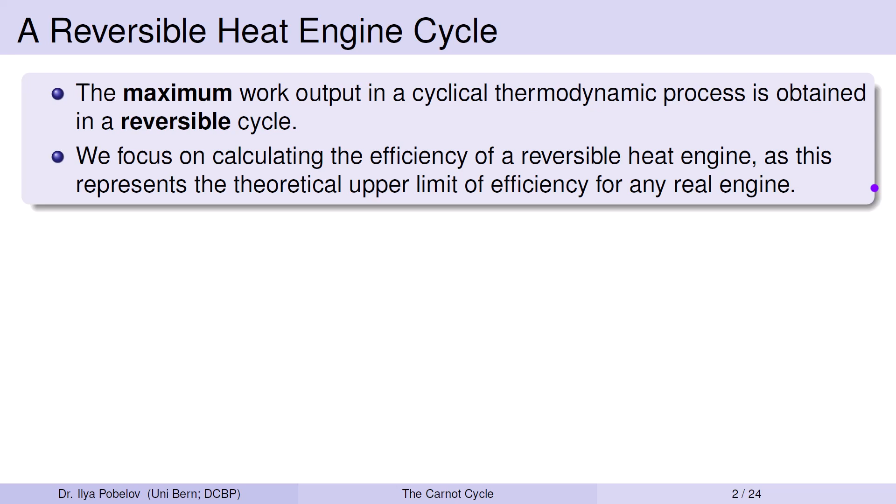As we have discussed previously, the maximum work output in a cyclical thermodynamic process, such as one taking place in heat engines, is obtained in a reversible cycle. Therefore, we focus on calculating the efficiency of a reversible heat engine, as this represents the theoretical upper limit of efficiency for any real engine.

A reversible heat engine converts heat into work by utilizing the natural tendency of heat to flow from a hot reservoir to a cold reservoir. The reversible process in such a reversible heat engine is known as the Carnot cycle, named after the French engineer Sadi Carnot, who was the first to study such cycles in the early 19th century.

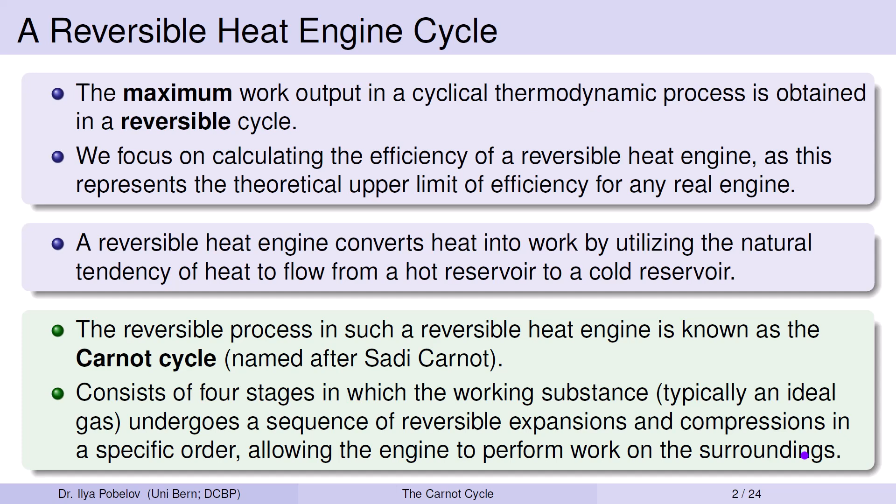The Carnot cycle consists of 4 stages in which the working substance, typically an ideal gas, undergoes a sequence of reversible expansions and compressions in a specific order, allowing the engine to perform work on the surroundings.

The Carnot cycle, also known as the Carnot process, was not described in detail by Sadi Carnot himself. While Carnot introduced the concept of a reversible heat engine in his 1824 work Réflexions sur la puissance motrice du feu, he did not provide a complete thermodynamic description of the cycle.

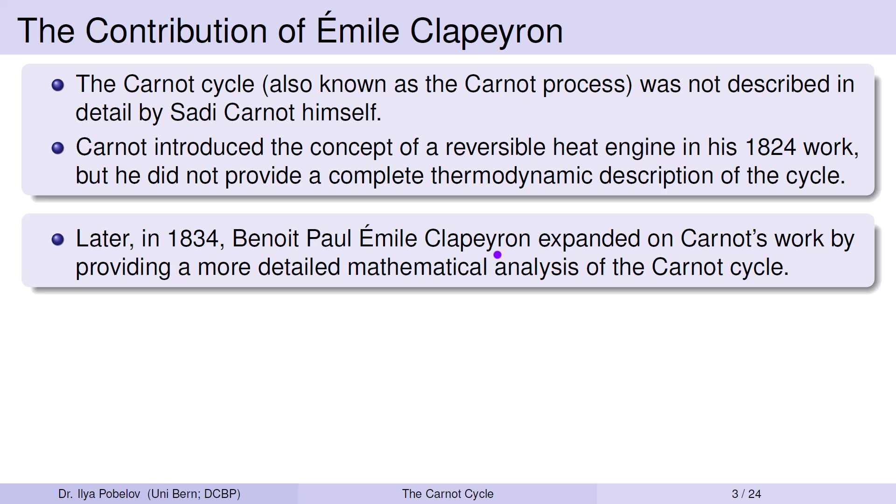It was later in 1834 that Benoit Paul-Émile Clapeyron expanded on Carnot's work by providing a more detailed mathematical analysis of the Carnot cycle. Émile Clapeyron was a French engineer and physicist whose career was deeply rooted in mathematics and engineering. He is known for his significant contributions to physical and mathematical theory, as well as for his work in practical engineering and particularly in the field of thermodynamics.

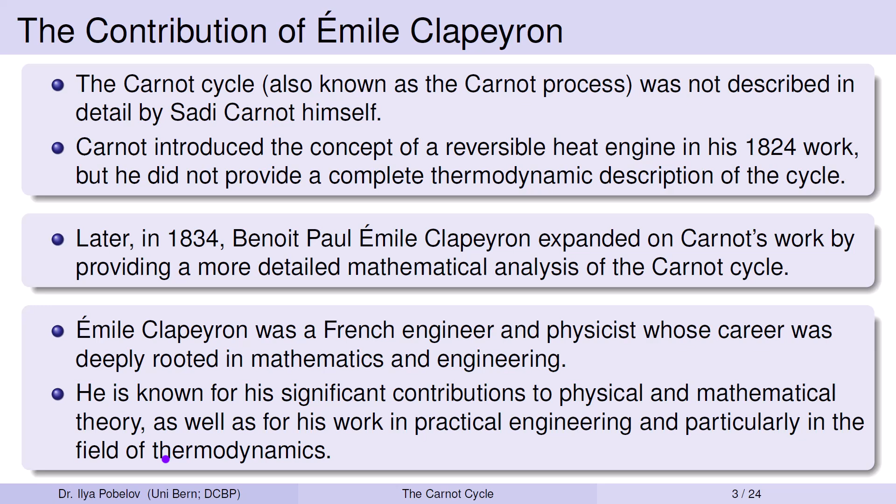After graduating from École Polytechnique in 1820, Émile Clapeyron spent a decade in St. Petersburg teaching mathematics and advancing mechanical engineering. Upon his return to France in 1830, he became a key figure in the emerging railway industry. He was designing and constructing major railway lines, as well as teaching at various academic institutions.

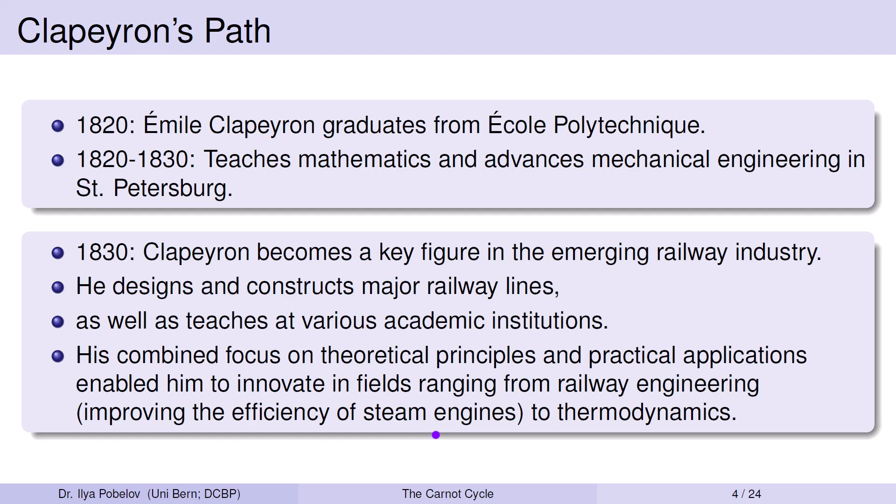His combined focus on theoretical principles and practical applications enabled him to innovate in fields ranging from railway engineering, where he improved the efficiency of steam engines, to thermodynamics.

Clapeyron's keen mind embraced the complex problem of how mechanical work is produced, especially in steam engines where there is a direct correlation between the amount of work generated and the amount of coal consumed.

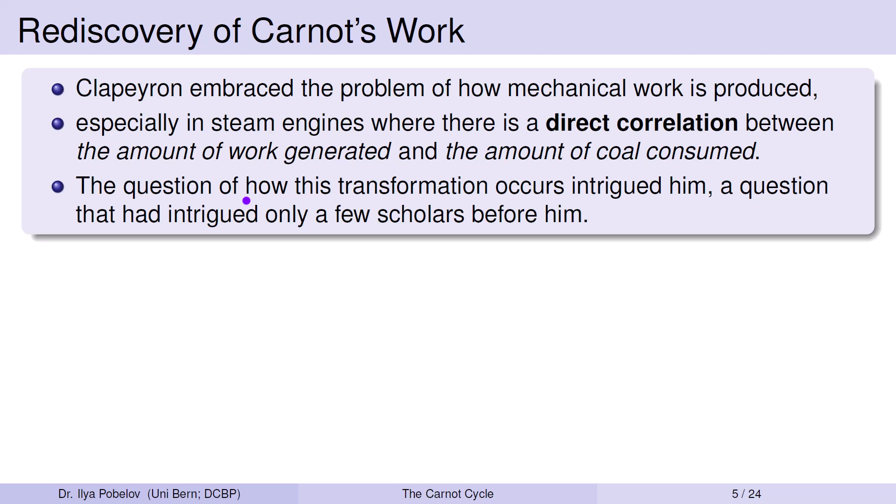The question of how this mysterious transformation occurs intrigued him, a question that had intrigued only a few scholars before him. He had the good fortune to come across a small booklet that was, at the time, little known but would later become famous due to his efforts.

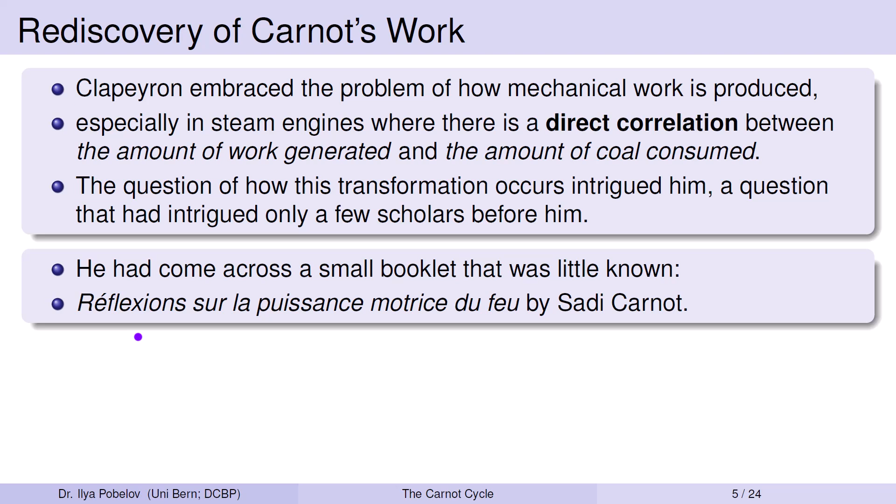Réflexions sur la puissance motrice du feu by Sadi Carnot. Struck by the depth and accuracy of Carnot's ideas, Clapeyron thoroughly studied the work, absorbed its essence, and expanded upon it in a groundbreaking account that marked a significant milestone in the history of science.

In his 1834 paper Mémoire sur la puissance motrice de la chaleur, Memoir on the Motive Power of Heat, Clapeyron drew attention to the ideas of Carnot, who had died 2 years earlier, by further developing them and presenting them in a more accessible form.

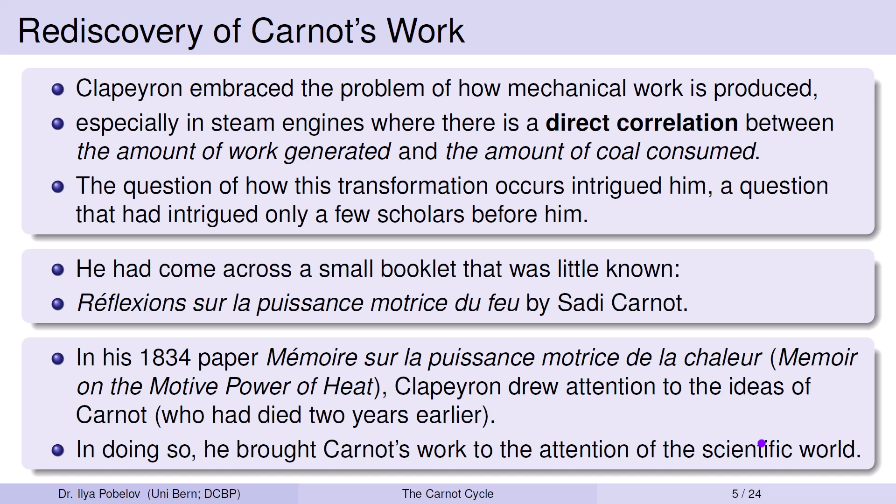In doing so, he brought Carnot's work to the attention of the scientific world, helping to lay the foundations for what would become thermodynamics. While the concept of the Carnot cycle originated with Sadi Carnot, it was through Clapeyron's development that we gained the comprehensive description and mathematical framework of the Carnot process.

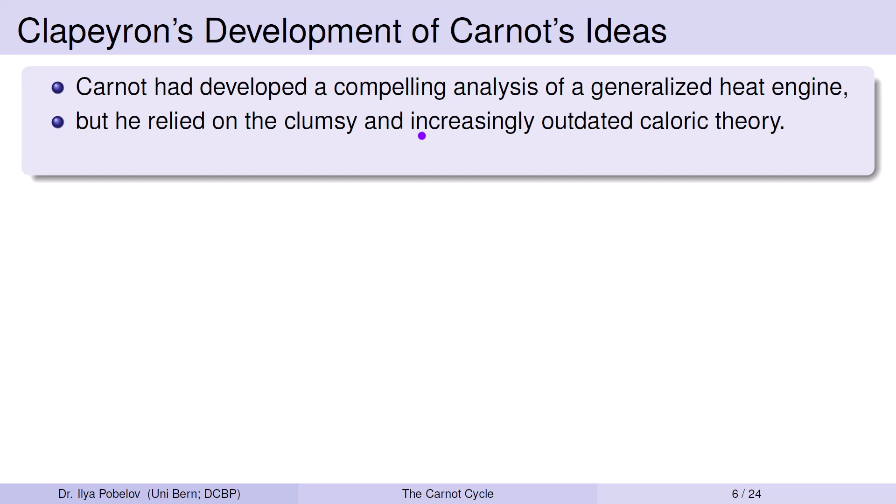Carnot had developed a compelling analysis of a generalized heat engine, but he relied on the clumsy and increasingly outdated caloric theory. Sadi Carnot's work was virtually unknown before Clapeyron's paper.

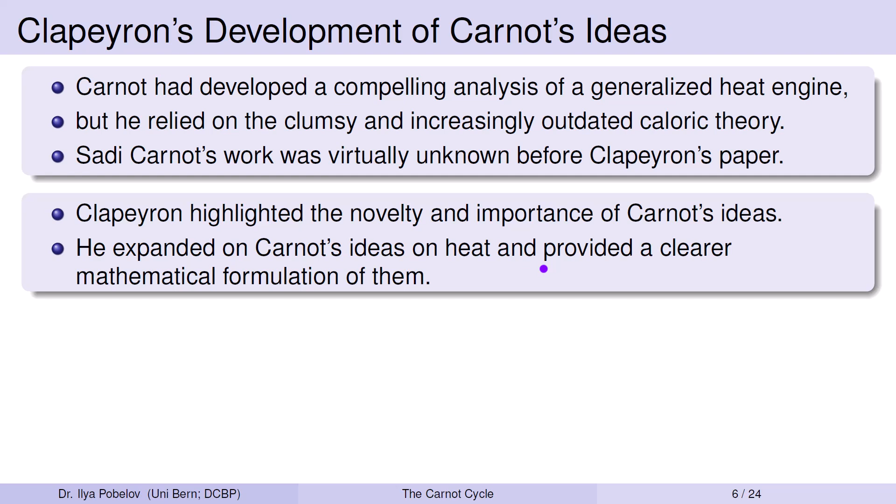Clapeyron, in his memoir, highlighted the novelty and importance of Carnot's ideas. He expanded on Carnot's ideas on heat and provided a clearer mathematical formulation of them.

He described the Carnot cycle using isothermal and adiabatic processes, which involve both heat exchange and work done by the system. Carnot's ideas were presented in a more accessible form using analytical methods and graphical representations.

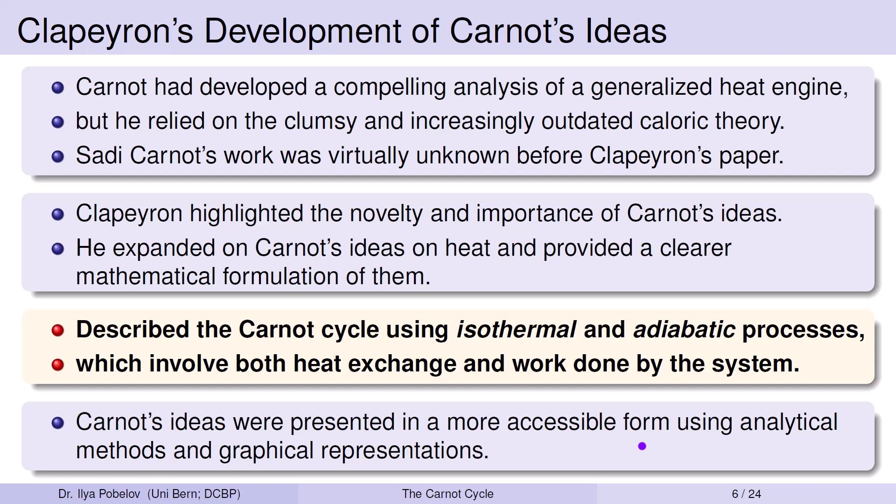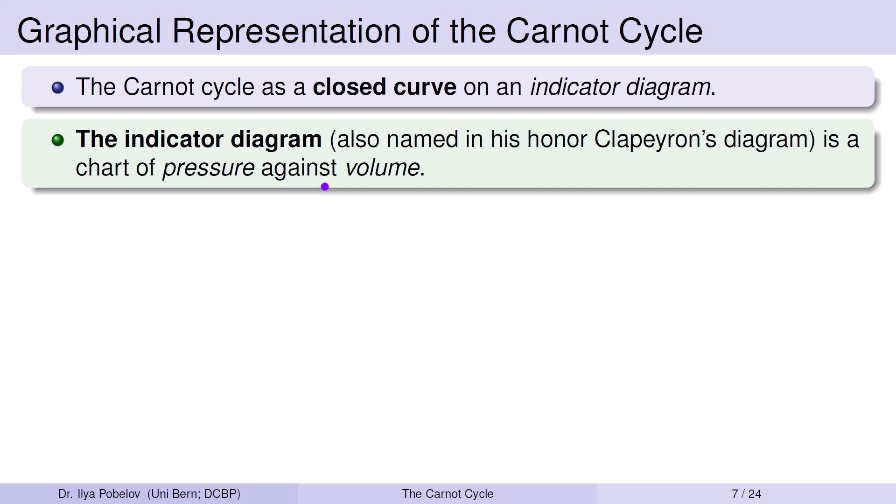Clapeyron depicted the Carnot cycle as a closed curve on an indicator diagram. The indicator diagram, also named in his honor Clapeyron's diagram, is a chart of pressure against volume. Clapeyron's analysis of Carnot's ideas was more broadly disseminated in 1843 when Johann Poggendorff translated his memoir into German.

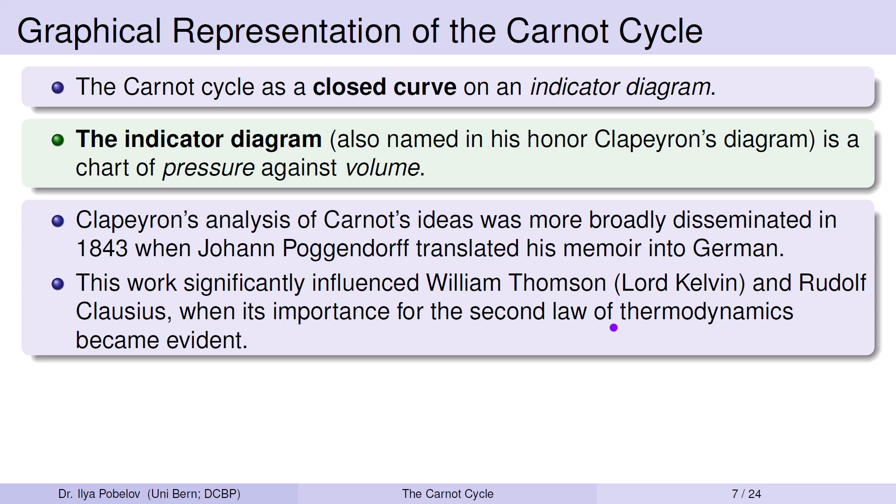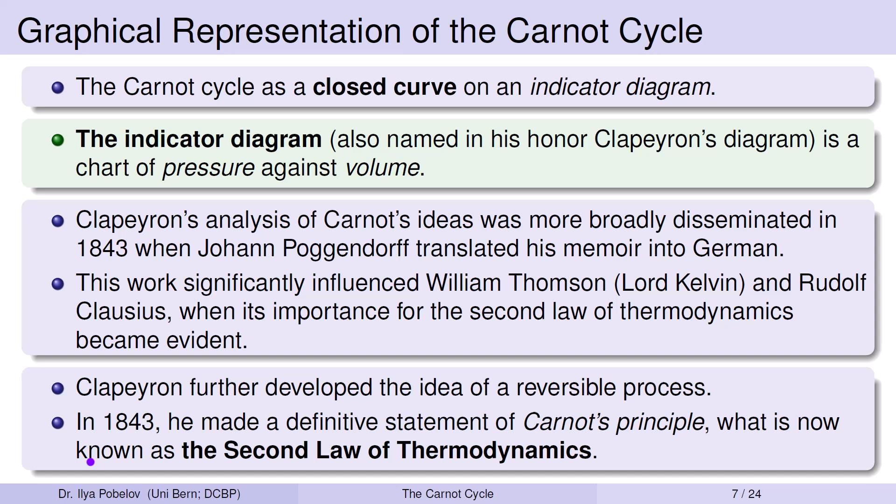This work significantly influenced William Thomson, Lord Kelvin, and Rudolf Clausius when its importance for the second law of thermodynamics became evident. Clapeyron further developed the idea of a reversible process already suggested by Carnot. In 1843, he made a definitive statement of Carnot's principle, what is now known as the second law of thermodynamics.

In the isothermal processes, the gas exchanges heat with a hot or cold reservoir while maintaining a constant temperature. In the adiabatic processes, there is no heat exchange with the surroundings, and the system's temperature changes as it expands or compresses. For simplicity, we consider an ideal gas as the working substance undergoing these steps.

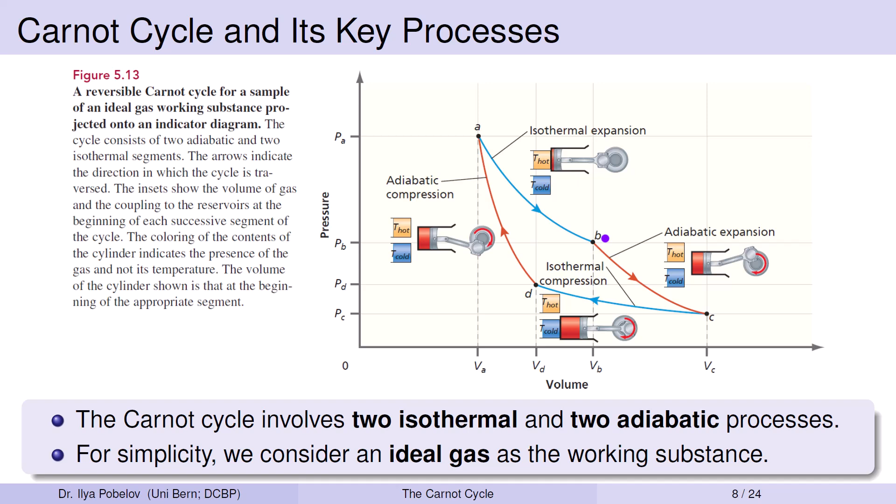The first step of the Carnot cycle is an isothermal expansion. In this stage, the heat engine is connected to a hot reservoir at temperature T hot. The gas absorbs heat from the hot reservoir, causing it to expand. As it undergoes a reversible isothermal expansion from point A to point B in the PV diagram, the gas does work on the surroundings while maintaining a constant temperature T hot.

In the second step, the piston is disconnected from the hot reservoir and the gas undergoes an adiabatic expansion. Unlike the first step, where the temperature remained constant, there is no heat exchange with the surroundings during this adiabatic process. As the gas expands from point B to point C in the PV diagram, it continues to do work on the surroundings. However, since no heat is transferred in or out of the system, the temperature of the gas decreases. By the end of this adiabatic expansion, the gas has cooled from T hot to T cold.

In the third step, the gas comes into contact with a cold reservoir and undergoes an isothermal compression from point C to point D in the PV diagram. During this isothermal process, the surroundings perform work on the gas and the gas releases energy as heat to the cold reservoir at T cold. The temperature remains constant at T cold throughout this compression.

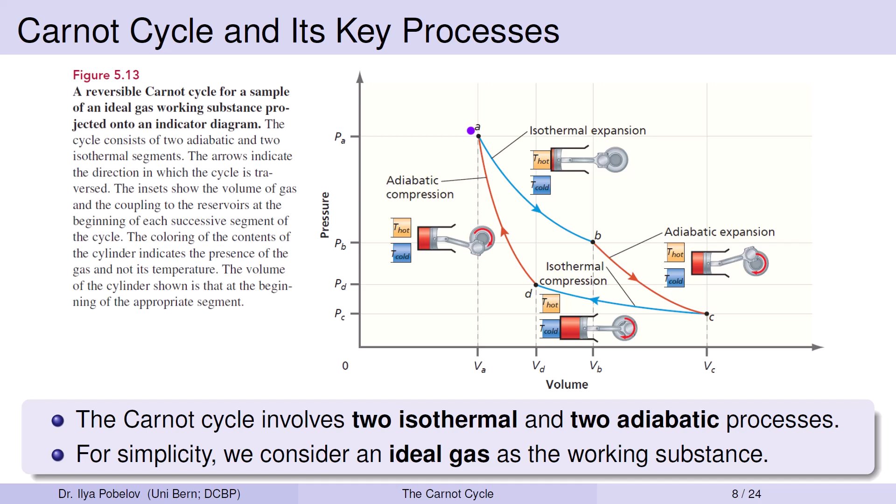heat absorbed from the hot reservoir. Before calculating the efficiency of the Carnot cycle, let's try to understand why it is designed in its specific form and why it is considered reversible.

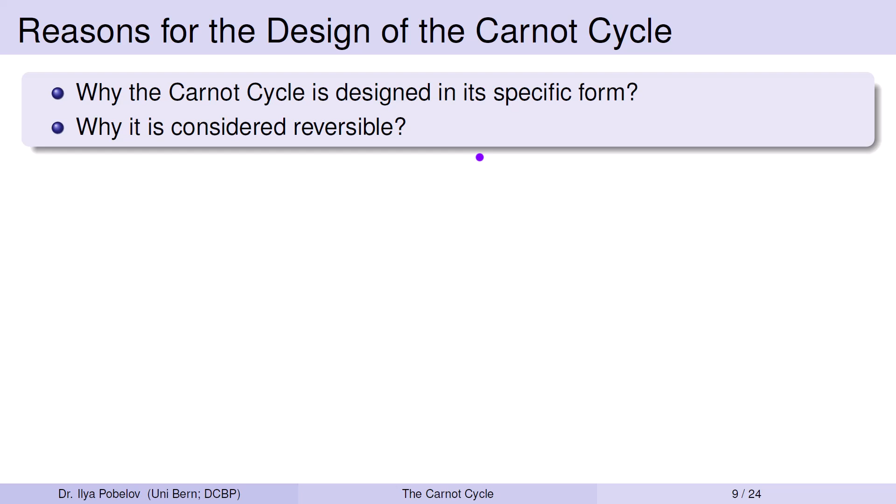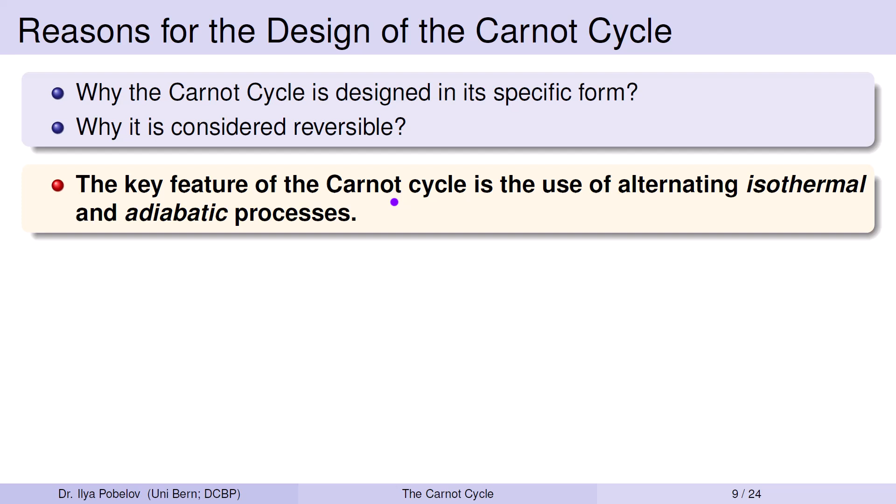The key feature of the Carnot cycle is the use of alternating isothermal and adiabatic processes. The isothermal segments ensure that heat is absorbed from the hot reservoir and released to the cold reservoir in a reversible manner, with the temperature remaining constant in both cases. The adiabatic segments are crucial for changing the temperature of the gas while preventing the irreversible exchange of heat with the surroundings. This design ensures that all heat exchanges occur at specific temperatures, allowing the cycle to be reversible and maximizing its efficiency.

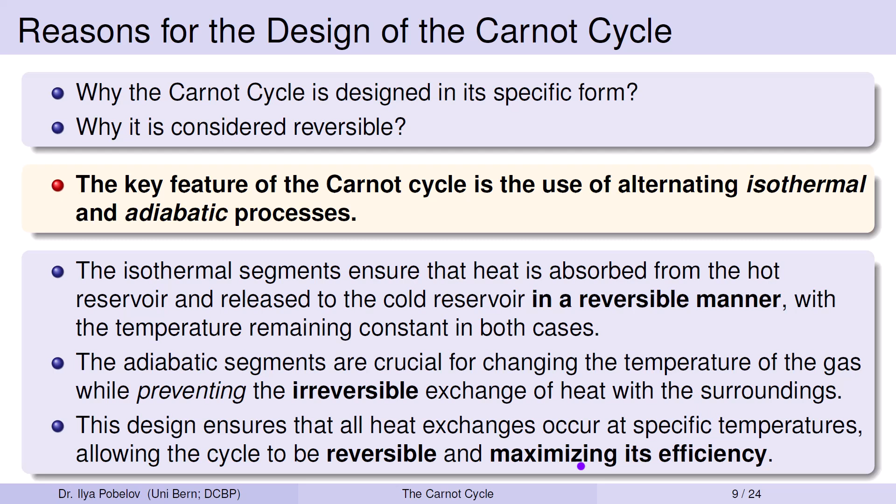The efficiency of the Carnot cycle can be determined by calculating the heat exchanged, the work done, and the change in internal energy for each segment of the cycle. For these calculations, we assume that the working substance with the amount of substance N behaves as an ideal gas with the molar heat capacity at constant volume CVM.

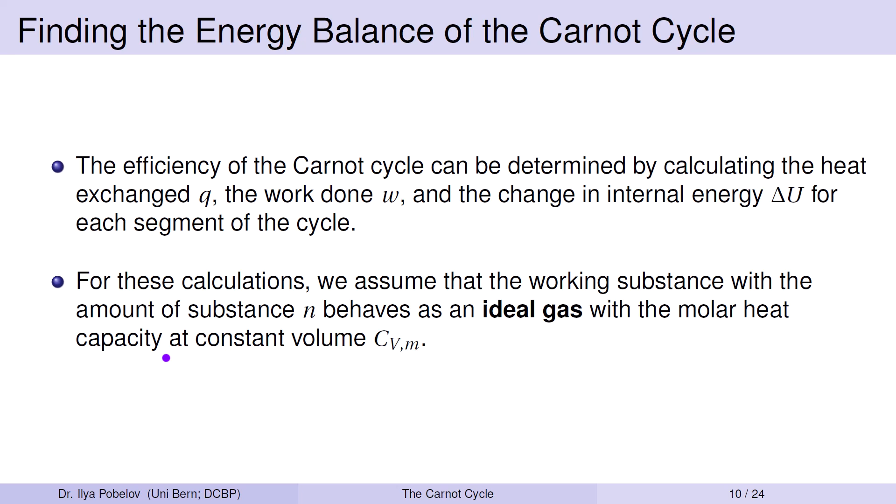In the first step, we have an isothermal reversible expansion of the gas from volume VA to VB at a constant temperature T hot, the highest temperature in this process, corresponding to the hot reservoir. During this isothermal expansion, the gas does work on the surroundings and absorbs heat from the hot reservoir.

Because the temperature remains constant in an isothermal process, the internal energy of the ideal gas does not change. Therefore, the change in internal energy delta U1 equals the work done by the system W1 plus the heat absorbed Q1, and this equals 0. This means that the work done by the gas in step 1, W1, is equal to the negative of the heat absorbed from the hot reservoir Q1.

For an ideal gas undergoing isothermal expansion, the work done by the system W1 equals negative N times the gas constant R times T hot times the natural logarithm of the ratio of the volumes VB to VA. Since the heat absorbed Q1 equals negative W1, it is given by N times R times T hot times the natural logarithm of VB divided by VA.

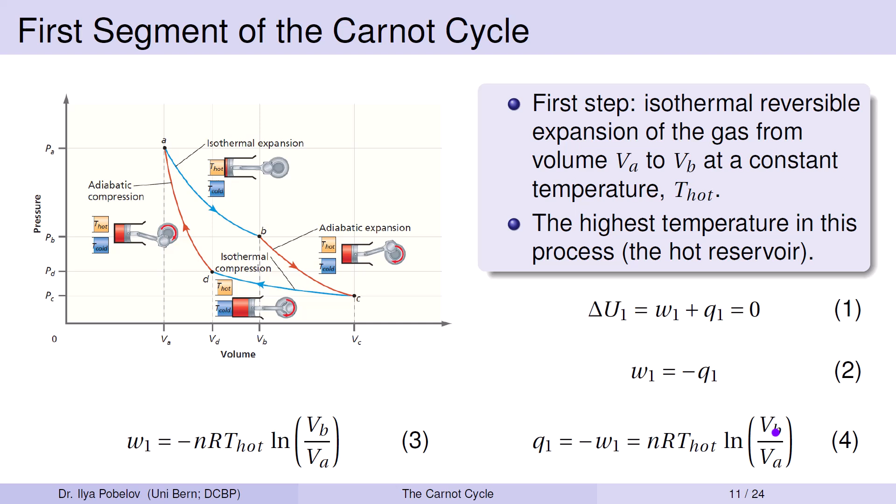The second step in the Carnot cycle is a reversible adiabatic expansion of the gas from volume VB to VC. During this process, the gas continues to expand and work W2 is done on the surroundings. However, unlike the first step, there is no heat exchange with the surroundings because the process is adiabatic. As a result, the temperature of the gas decreases from the temperature of the hot reservoir T hot to that of the cold reservoir T cold.

According to the first law of thermodynamics, in an adiabatic process where no heat is exchanged, Q2 is 0, so the change in internal energy of the system, delta U2, is equal to the work done by the gas, W2. The work done during this reversible adiabatic expansion can be calculated by considering the change in internal energy, which depends on the amount of substance of the gas, its molar heat capacity at constant volume, and the temperature change from T hot to T cold: N times CVm multiplied by the difference between T cold and T hot.

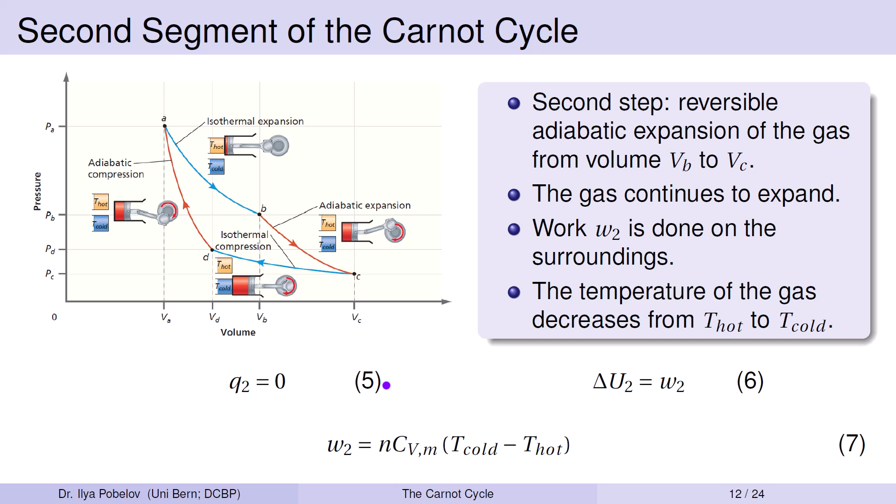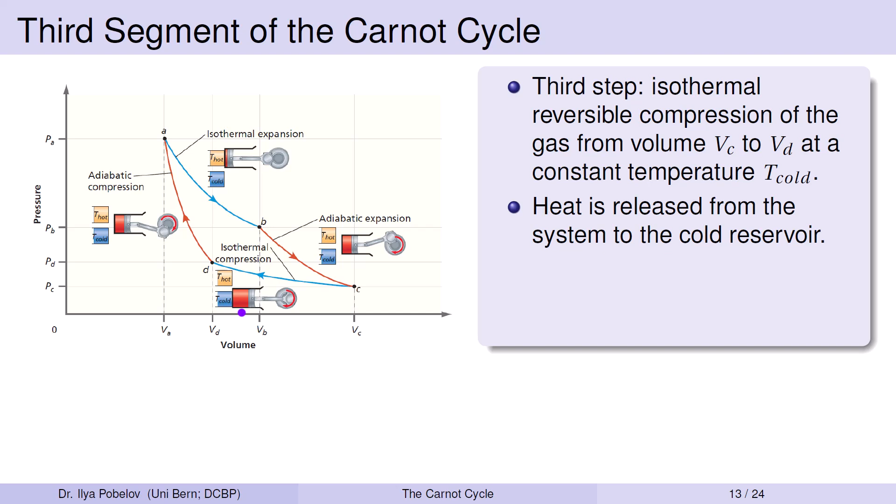This step results in the gas cooling down to the temperature of the cold reservoir T cold while performing work on the surroundings. The third step in the Carnot cycle is an isothermal reversible compression of the gas from volume Vc to Vd, occurring at the constant temperature of the cold reservoir T cold. During this step, heat is released from the system to the cold reservoir at T cold. The surroundings perform work on the system, causing the gas to compress.

In an isothermal process with an ideal gas, the internal energy change, delta U3, is zero because there is no change in temperature. Consequently, the heat released Q3 is equal to the negative of the work done, W3. The work done, W3, is given by negative N times R times T cold times the natural logarithm of Vd divided by Vc. And the corresponding heat released to the cold reservoir, Q3, is N times R times T cold times the natural logarithm of Vd divided by Vc.

In this process, the work is positive because the surroundings do work compressing the system and reducing the gas volume from Vc to Vd. The heat released from the system to the surroundings is negative.

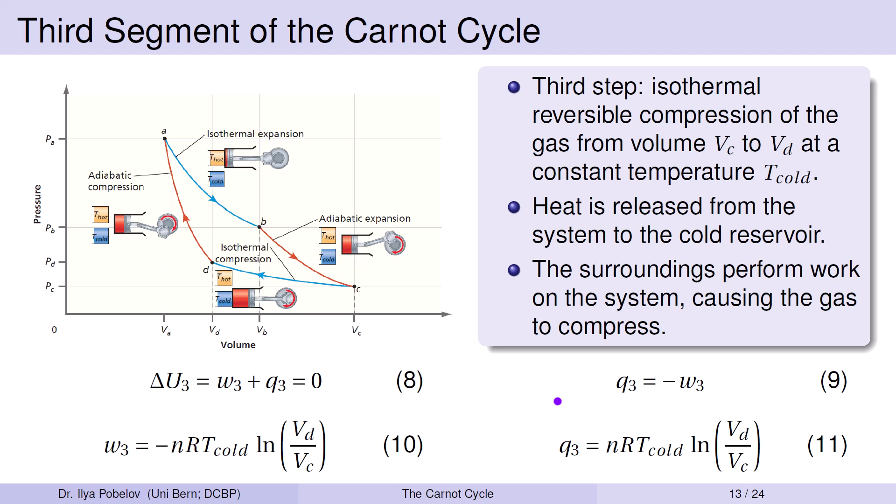The fourth step in the Carnot cycle is a reversible adiabatic compression, where the volume of the gas decreases from Vd to Va. During this adiabatic compression, work W4 is done on the system by the surroundings. The temperature of the gas increases from T cold to T hot. Since this process is adiabatic, there is no heat exchange with the surroundings.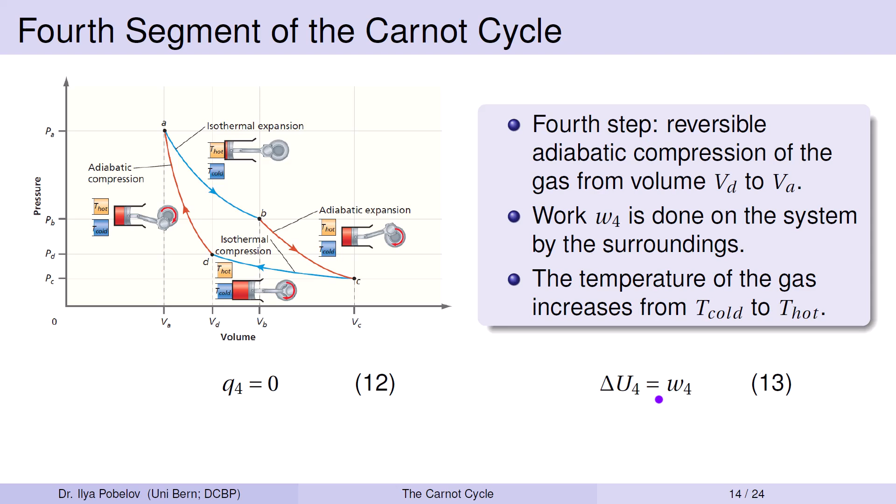According to the first law of thermodynamics, the change in internal energy of the gas, delta U4, is equal to the work done on the gas, W4. Therefore, the work done during this adiabatic compression, W4, equals N times CVm multiplied by the difference between T hot and T cold. All in all, in this adiabatic compression step, the work performed on the gas increases its temperature back to T hot, which completes the Carnot cycle by returning the gas to its initial state.

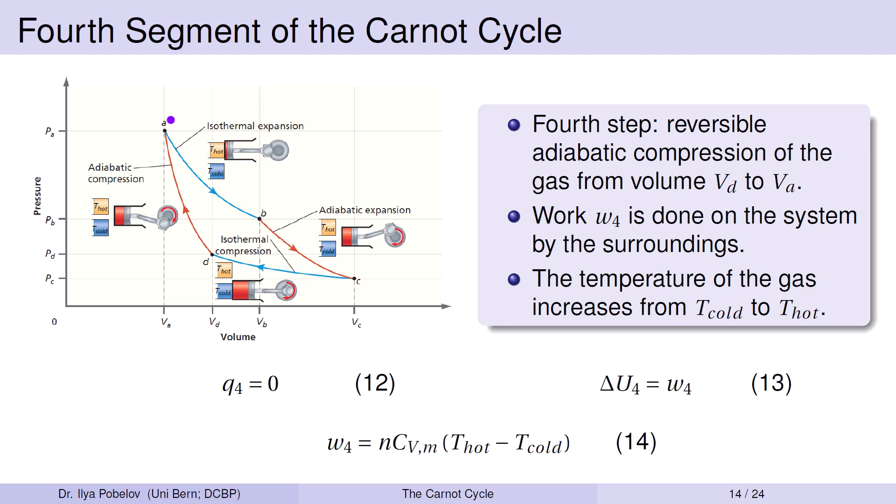The total work done by the Carnot engine during one complete cycle corresponds to the area enclosed by the cycle on a pressure-volume diagram. This work is the sum of the work done in each of the four steps of the cycle. However, the net work done during the adiabatic steps 2 and 4 is zero. As a result, the total work done by the cycle is determined only by the work done during the isothermal steps 1 and 3.

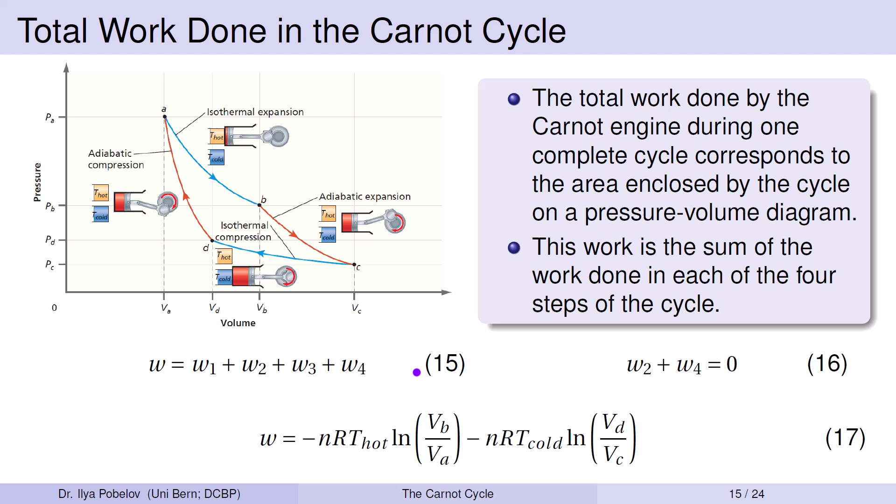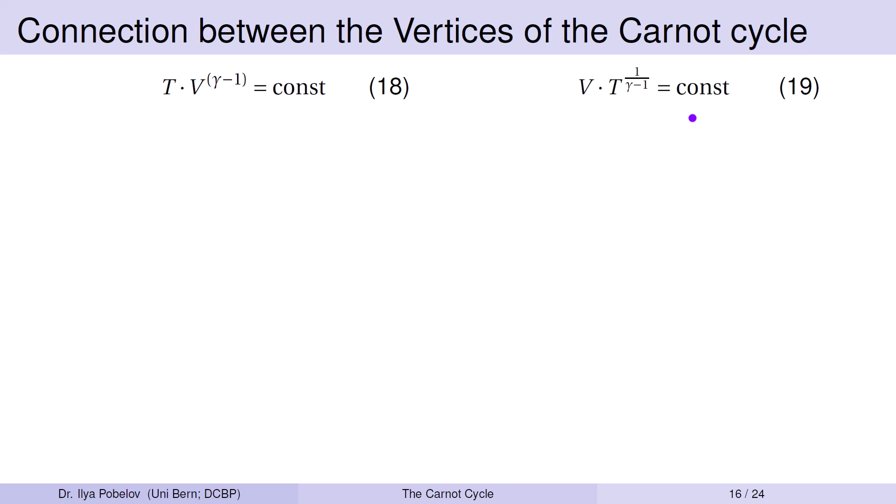Let's now examine the adiabatic processes in the Carnot cycle more closely. In a reversible adiabatic process, the temperature T and volume V are related by the equation T times V raised to the power of gamma minus 1 is constant. Alternatively, we can express this as V times T raised to the power of 1 over gamma minus 1 is constant. This relationship holds for both adiabatic steps.

For the second step, an adiabatic expansion from Vb to Vc that cools the gas from T hot to T cold, the relationship is Vb times T hot raised to the power of 1 over gamma minus 1 equals Vc times T cold raised to the power of 1 over gamma minus 1.

For the fourth step, an adiabatic compression from Vd to Va that warms the gas from T cold to T hot, the relationship is Vd times T cold raised to the power of 1 over gamma minus 1 equals Va times T hot raised to the power of 1 over gamma minus 1.

If we multiply these two expressions, we obtain Vb times Vd times T cold raised to the power of 1 over gamma minus 1 times T hot raised to the power of 1 over gamma minus 1 equals Va times Vc times T cold raised to the power of 1 over gamma minus 1 times T hot raised to the power of 1 over gamma minus 1.

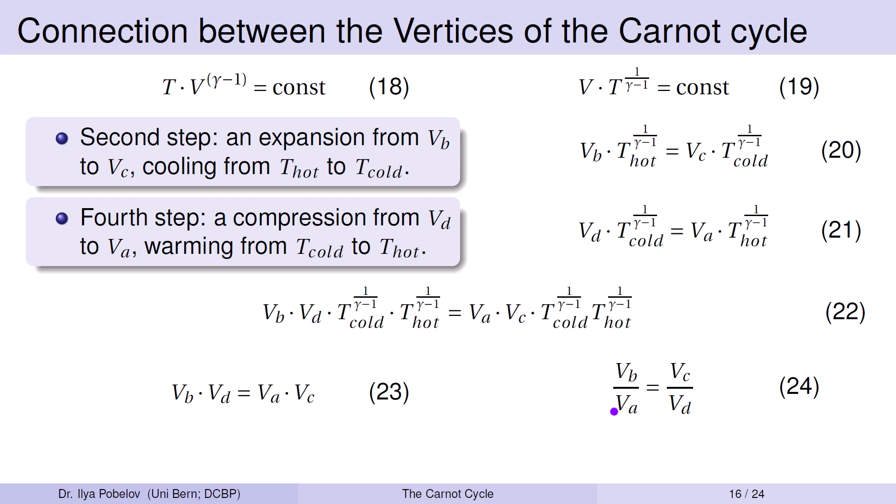When we cancel out the temperature terms on both sides of the equation, we simplify these to Vb times Vd equals Va times Vc. This can be reformulated as the ratio of Vb to Va equals the ratio of Vc to Vd. This means that the volumes Va, Vb, Vc, and Vd are not independent in this process; they are interrelated by the above equations. This interdependence of vertices is a key feature of the Carnot cycle.

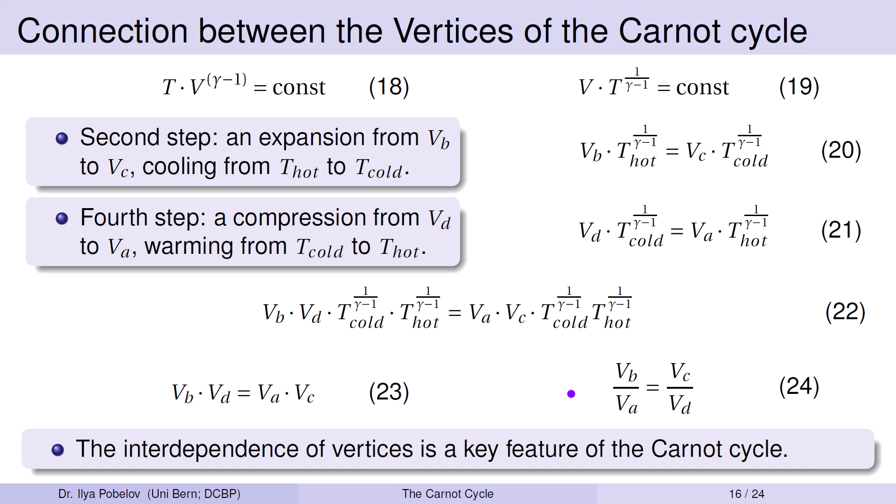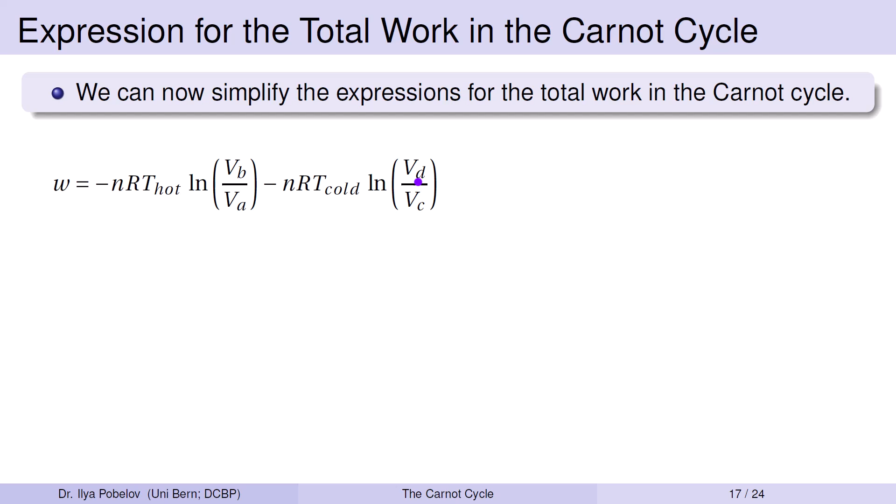We can now simplify the expression for the total work done in the Carnot cycle. The total work done in the cycle is equal to negative n times r times T hot times the natural logarithm of Vb over Va minus n times r times T cold times the natural logarithm of Vd over Vc. This can be simplified to negative n times r times the sum of T hot times the natural logarithm of Vb over Va and T cold times the natural logarithm of Vd over Vc.

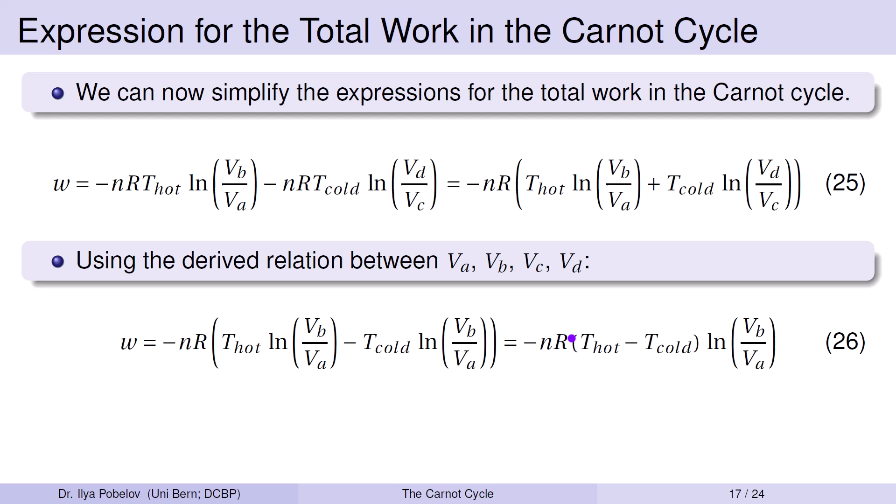By using the derived relation between gas volumes at points A, B, C, D, the expression simplifies further to negative n times r times the difference between T hot and T cold times the natural logarithm of Vb over Va. This final form shows that the total work done in the Carnot cycle is proportional to the temperature difference between the hot and cold reservoirs and the logarithm of the volume ratio Vb to Va.

Since T hot is greater than T cold and Vb is greater than Va, the total work has a negative sign, indicating that net useful work is performed by the system during the Carnot cycle.

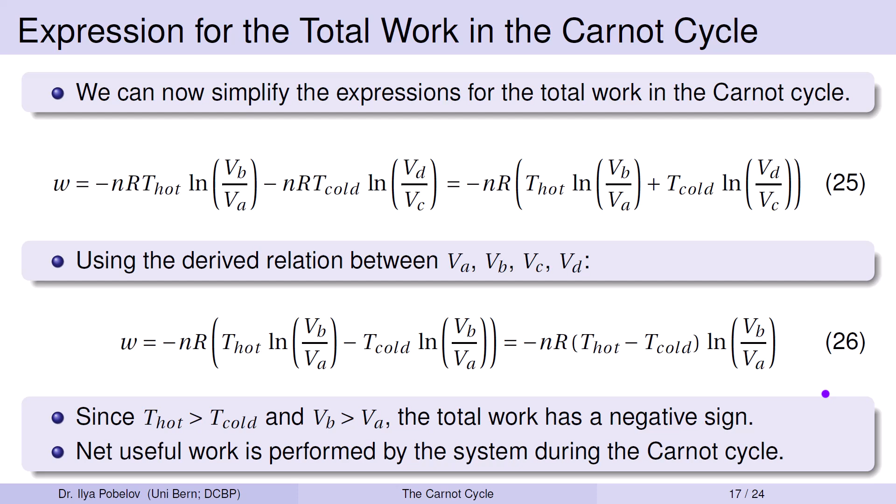Now let's discuss the efficiency of the Carnot cycle. The heat absorbed by the system from the hot reservoir during the isothermal expansion can be expressed as N times R times T hot times the natural logarithm of Vb over Va. The efficiency eta is the ratio of the absolute value of the net work done by the engine to the heat absorbed from the hot reservoir.

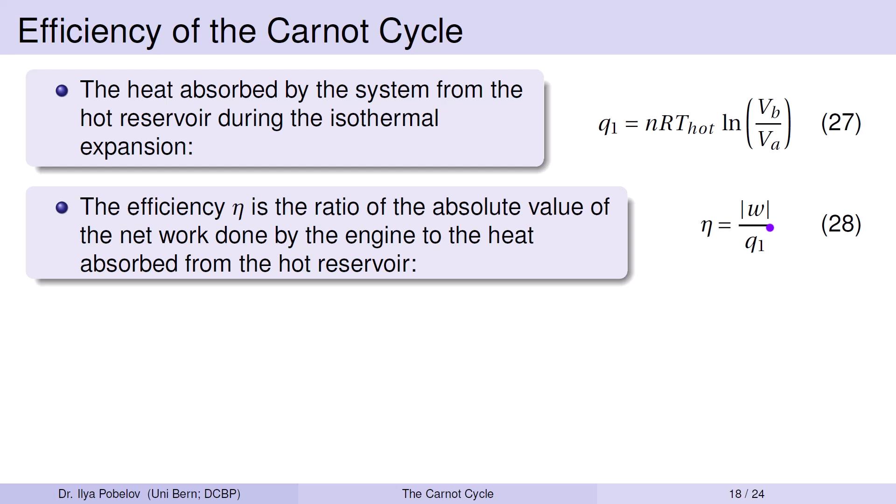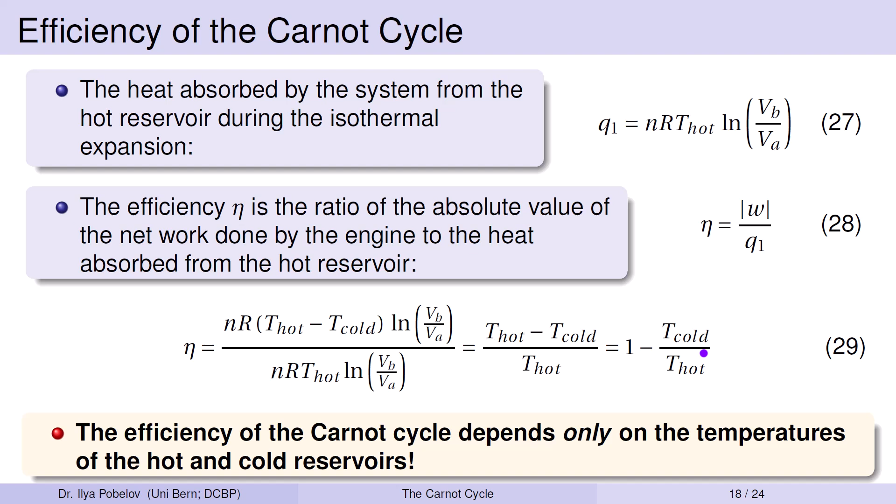Substituting the expressions for total work and absorbed heat into this equation, we find eta equals the difference between T hot and T cold divided by T hot, which simplifies to 1 minus T cold divided by T hot. This shows that the efficiency of the Carnot cycle depends only on the temperatures of the hot and cold reservoirs.

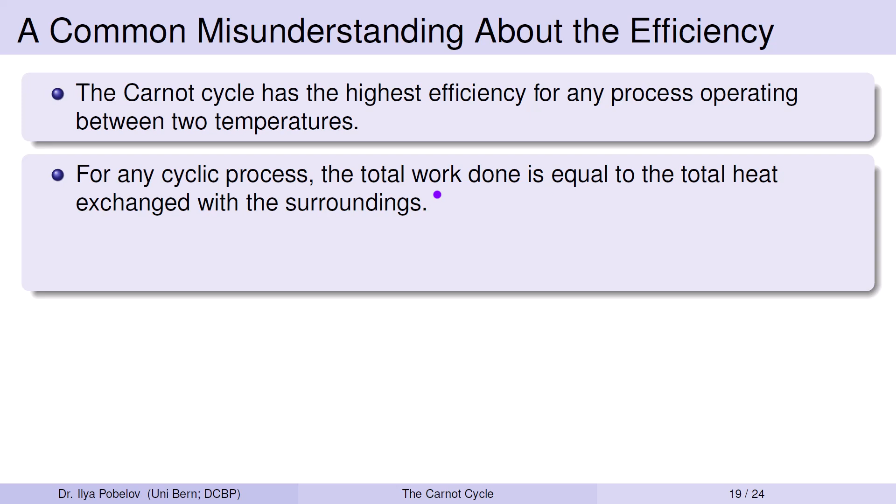There is a common misunderstanding related to the efficiency of the Carnot cycle. On one hand, according to one formulation of the second law of thermodynamics, the Carnot cycle has the highest efficiency for any process operating between two temperatures. On the other hand, for any cyclic process, the total work done equals the total heat exchanged with the surroundings. This simply follows from the first law of thermodynamics: the work done in a cycle equals the heat exchanged in that cycle.

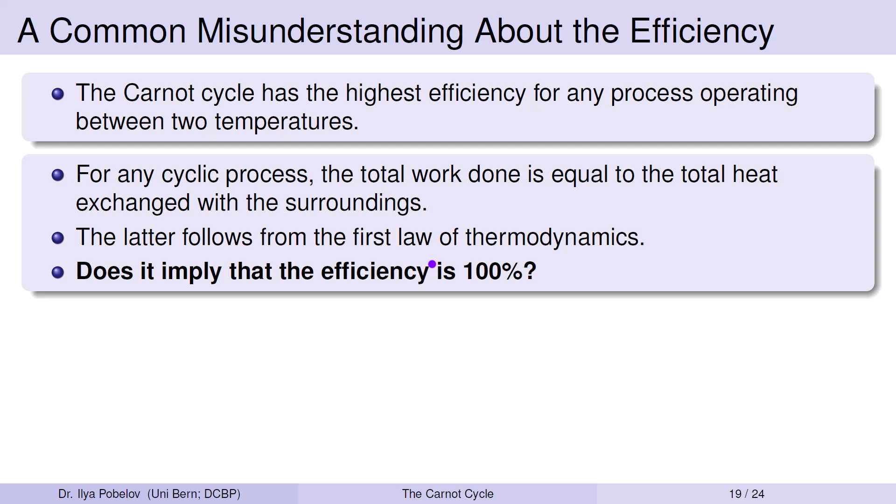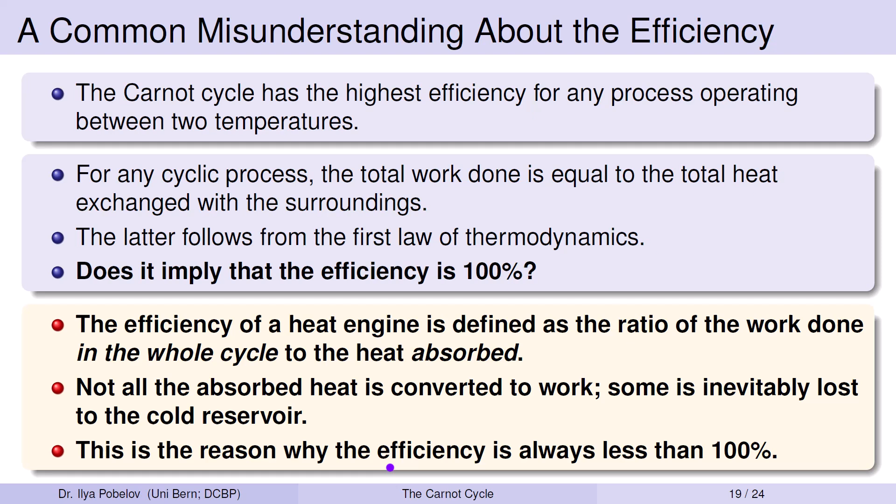So what does this mean? Does it imply that the efficiency is 100%? Of course not. The efficiency is not 100%, and here's why: the efficiency of a heat engine is defined as the ratio of work done in the whole cycle to the heat absorbed. In the Carnot cycle, not all absorbed heat is converted to work—some is inevitably lost to the cold reservoir. This is why efficiency is always less than 100%.

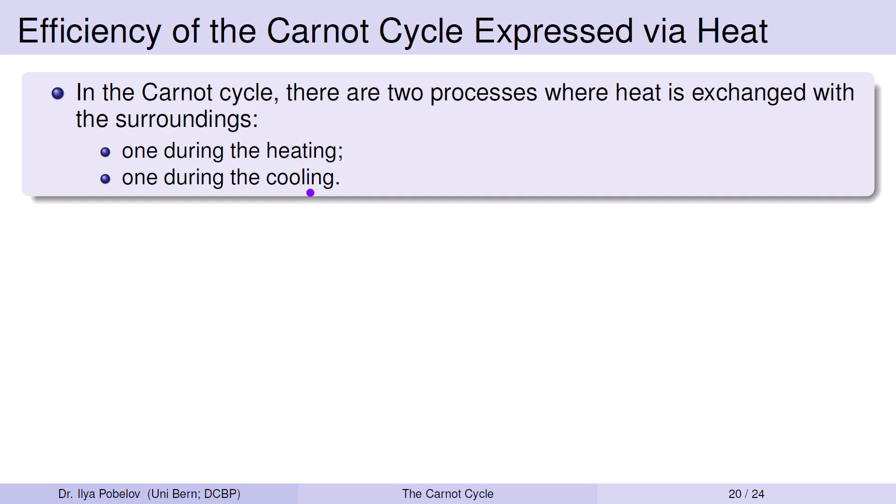In the Carnot cycle, there are two processes where heat is exchanged with the surroundings: one during heating and one during cooling. When the system cools down, the released heat is simply considered a loss and not accounted for in the engine's efficiency. If we rearrange the terms in the definition of efficiency, we get: efficiency equals the heat added during heating plus the negative heat removed during cooling, divided by the heat added.

Note that this is a theoretical definition of efficiency. This formula shows again that the efficiency of the Carnot cycle is always less than 100%, because some heat is inevitably lost to the cold reservoir.

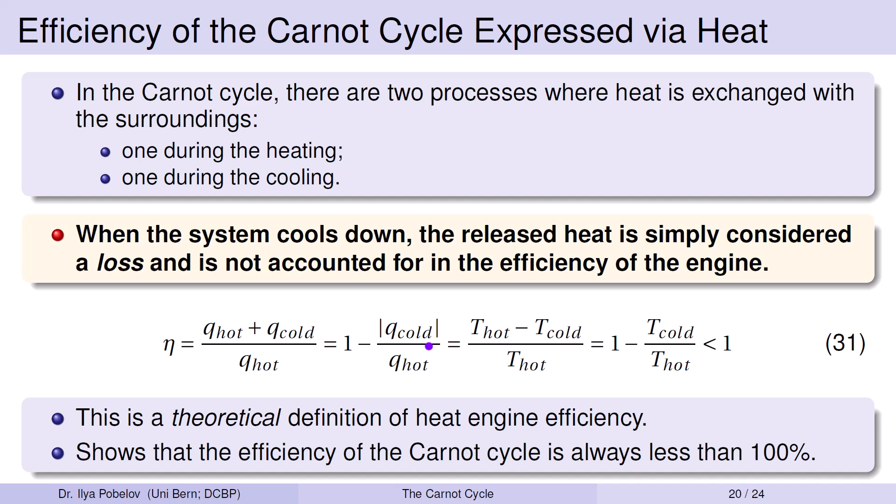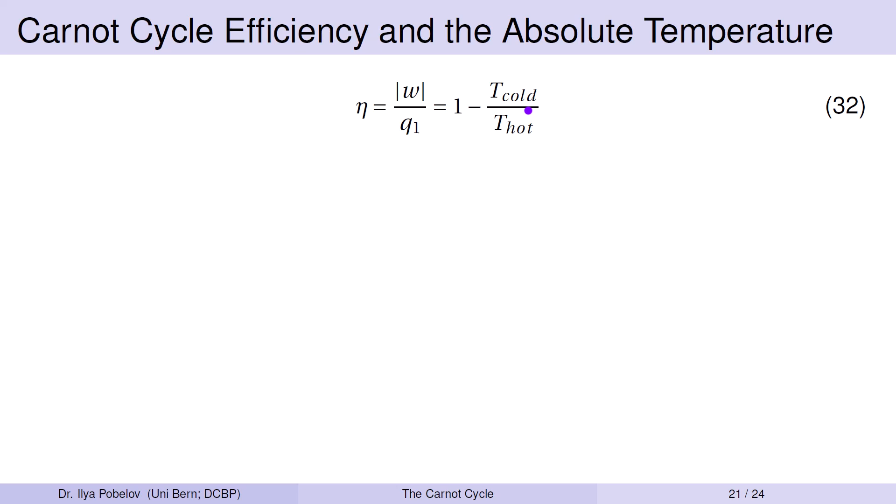Let's take another look at the formula for the efficiency of the Carnot cycle. You can see that it depends on the temperatures of the hot and cold reservoirs. Specifically, efficiency increases when the cold reservoir's temperature decreases and the hot reservoir's temperature increases. In other words, the higher the temperature at which heat is supplied and the lower the temperature at which heat is rejected, the more efficient the cycle becomes.

Now, when could we theoretically achieve 100% efficiency? This would happen if the ratio of T cold to T hot approaches zero. There are two theoretical ways this could happen: either the temperature of the hot reservoir becomes infinitely high, or the temperature of the cold reservoir reaches absolute zero, which is 0 Kelvin.

While an infinitely high temperature for the hot reservoir is not practically achievable, let's explore the second option more closely. If the cold reservoir could reach 0 Kelvin, the efficiency would indeed be 100%, as all absorbed heat could be converted into work. However, without going into detail, according to another principle of thermodynamics, reaching absolute zero is impossible. So while the Carnot efficiency formula suggests perfect efficiency could be possible, it also brings us to understand that such a scenario is actually impossible.

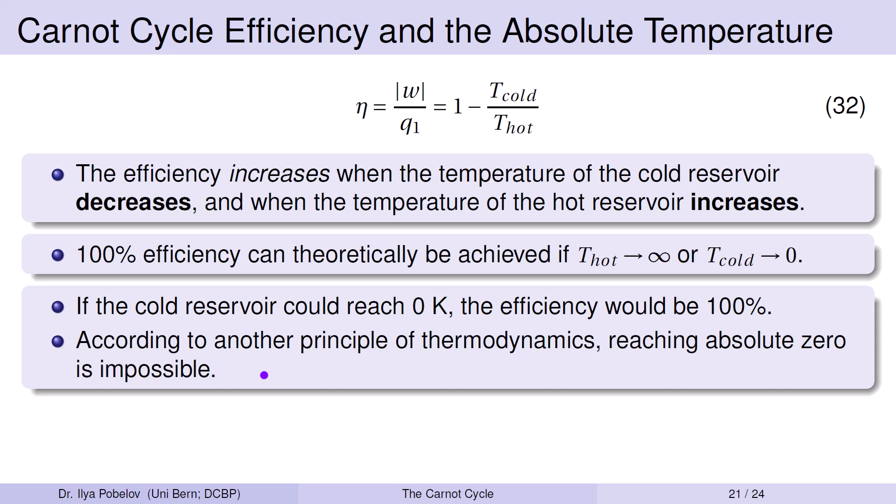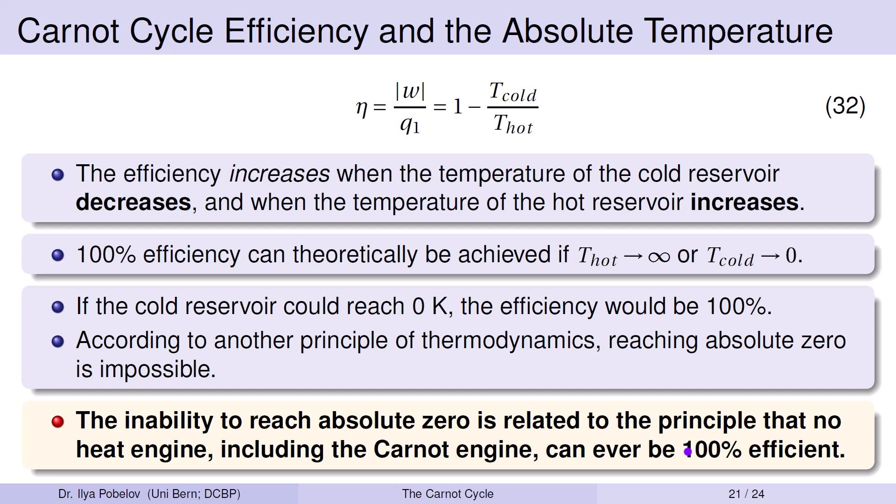The inability to reach absolute zero is related to the principle that no heat engine, including the Carnot engine, can ever be 100% efficient. This is in line with the Kelvin-Planck statement of the second law of thermodynamics, which says that no process is possible whose sole result is the complete conversion of heat into work.

Let's talk about how we can improve the practical efficiency of heat engines using a concept known as cogeneration. In theory, the efficiency of a heat engine is defined as the ratio of work done to heat absorbed. This theoretical definition assumes that the heat removed during cooling is entirely lost. For example, in conventional power plants, waste heat is typically released into the atmosphere.

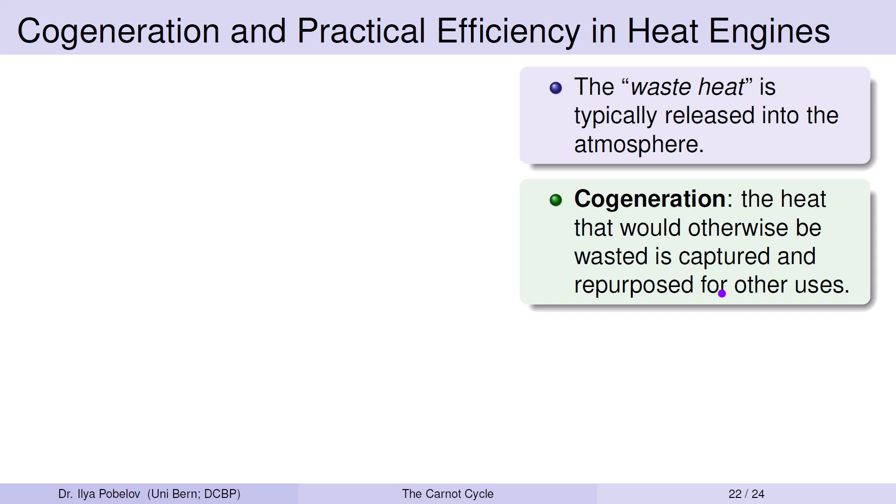However, the efficiency of real-world systems can be significantly improved through innovative methods like cogeneration. This is a process where the heat that would otherwise be wasted is captured and repurposed for other uses, such as heating water for buildings.

Cogeneration is particularly useful in urban areas, where the proximity of power plants to buildings minimizes the loss of heat during transportation. By using the waste heat for local heating, we reduce the total fuel consumption required for both electricity and heat production.